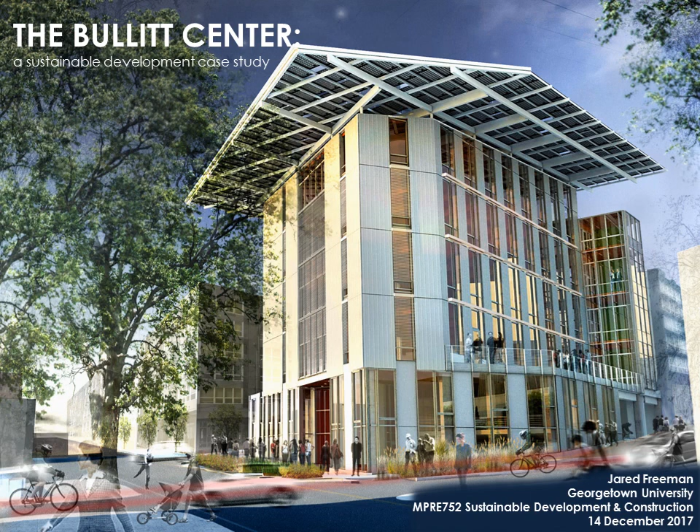Hello, class. The Bullitt Center, built in Seattle, Washington in 2013, is considered to be the most sustainable office building in the world. A project with such high performance level has never been done at this scale before. The Bullitt Center comes in at 52,000 square feet with a project cost of $32.5 million.

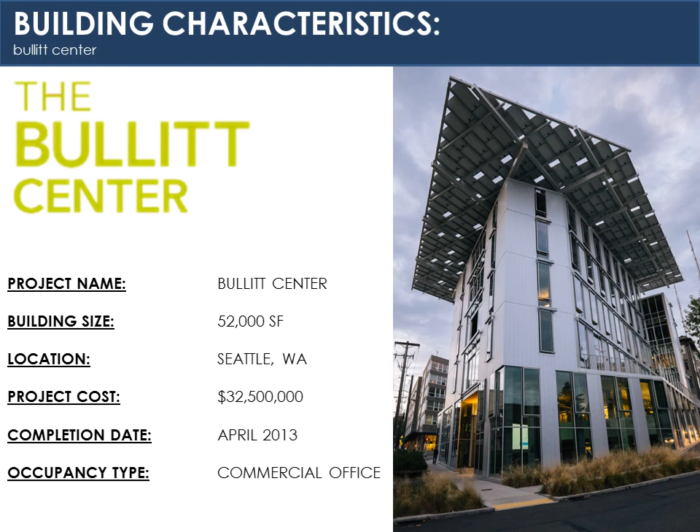The project team starts and ends with the owner and developer of the building. The Bullitt Foundation, a sustainably charged private foundation that founded Earth Day and promotes responsible human activities and green communities, is the sole owner of the property.

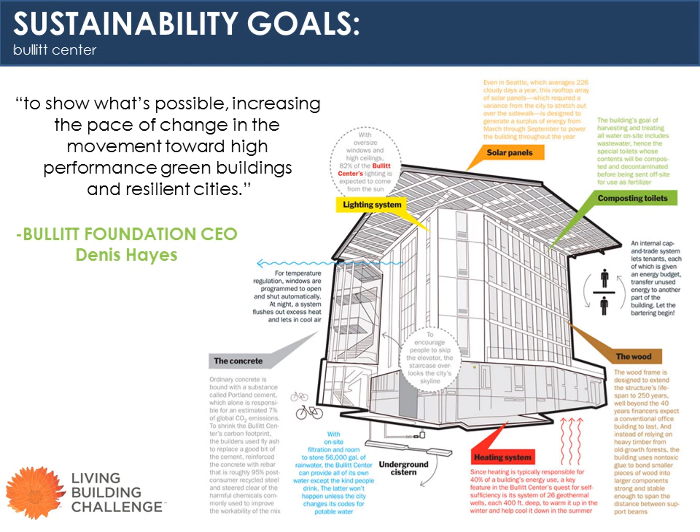The Bullitt Foundation had clear goals set for the development of the Bullitt Center. Denis Hayes, the foundation's CEO, understands the harsh effects buildings are having on our environment. As a result, his goal for the project was to show what's possible, increasing the pace of change in the movement towards high performance, green buildings, and resilient cities.

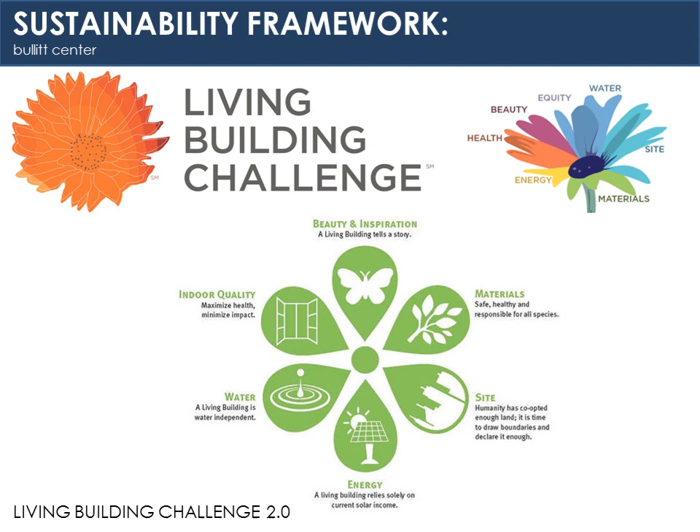The Living Building Challenge is the best framework for the Bullitt Center to meet the end goal. The program, made up of 7 petals, is considered to be the most intense green framework and the best for the environment. Much of the framework relies on self-produced and renewable resources in order to become more environmentally independent and self-sustaining. No project of this size had ever become Living Building certified.

With the team in place, the best approach to maximize expertise and efficiency was with an integrated design process. This consists of all parties being engaged in all aspects of the project as a complete team from beginning to end, allowing for every partner's point of view to be considered in an effort to come up with the best possible solution.

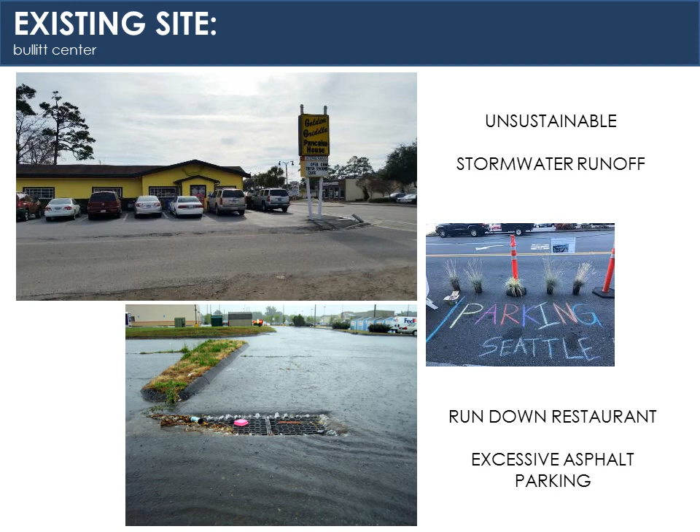Regarding the construction of the Bullitt Center, first and foremost, existing on-site was a single-story restaurant with a large asphalt parking lot. The site needed to be cleared in order to start the project. Once the site was cleared and the structure of the new building was being erected, it was important to the design team to minimize the embodied carbon used in harvesting and producing building materials.

To produce concrete, a lot of carbon and energy is expended. For this reason, the use of concrete was minimized to the foundation and first floor of the building for structural reasons. Heavy timbers from FSC certified forests made up the rest of the structure, which was much more environmentally friendly.

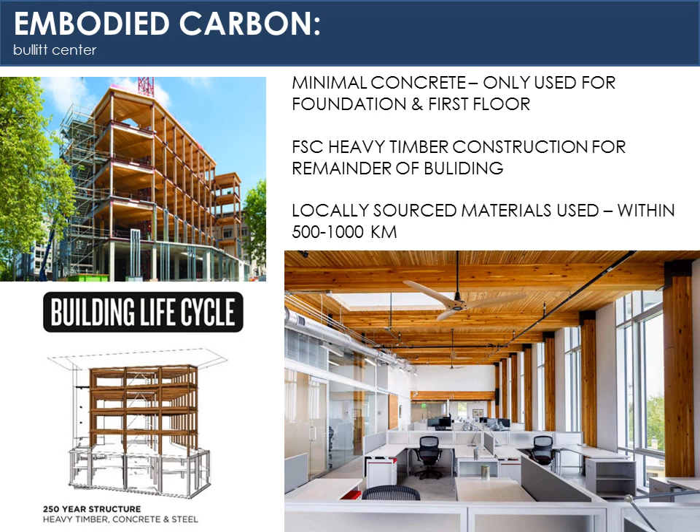Next, as a result of being able to build from a clean site, the building was oriented to maximize energy production. 575 total solar panels were designed and installed in an array above all neighboring roof lines. They have the capacity to generate an estimated 230,000 kilowatt hours per year, enough to power almost the entire building on its own.

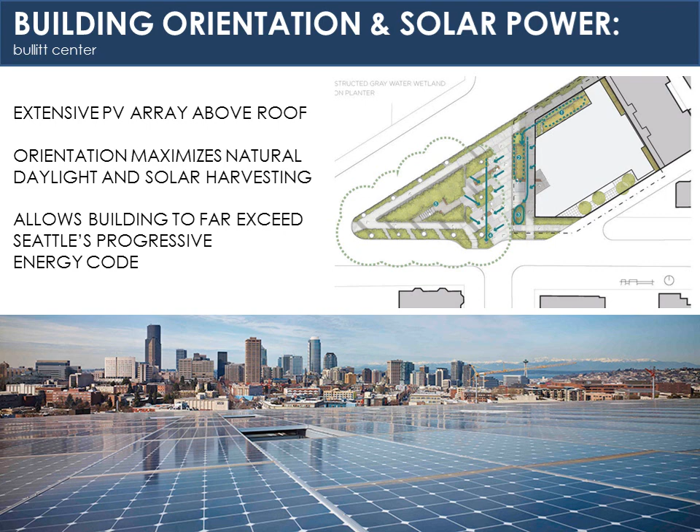Also, as a result of the building's orientation, natural daylighting is maximized, allowing for the reduction of artificial lighting. The Bullitt Center's design includes the use of a triple glazed curtain wall facade that allows a specific level of light into the building and also controls the heat transfer from inside to out.

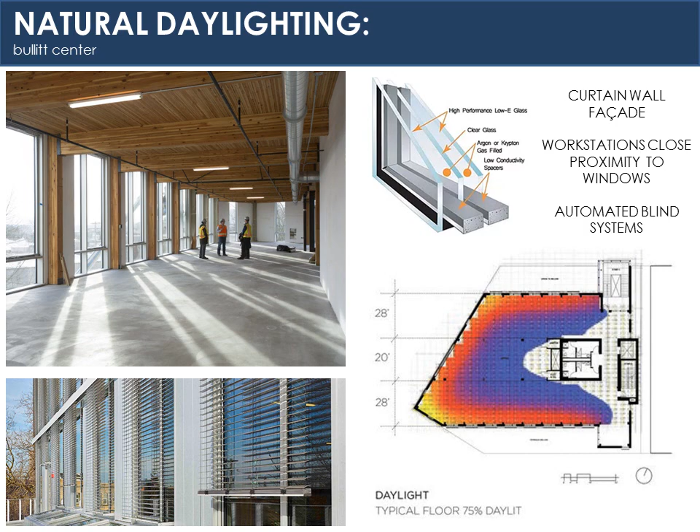All workstations are also within 28 feet of the exterior facade, ensuring that all building occupants will have access to daylight. Finally, an automated blind system is also part of the daylighting strategy. Blinds can reduce or increase glare and quality of light depending on the specific task at hand. In situations where artificial light is needed, LEDs are used.

In regards to optimizing air circulation and occupant comfort, the Bullitt Center's curtain wall facade also has operable windows allowing for air quality, building temperature, and comfort to be personalized per occupant. Being glazed on 3 of 4 sides enables air to circulate properly with taller floor-to-floor heights, allowing for heat to rise and exit the building.

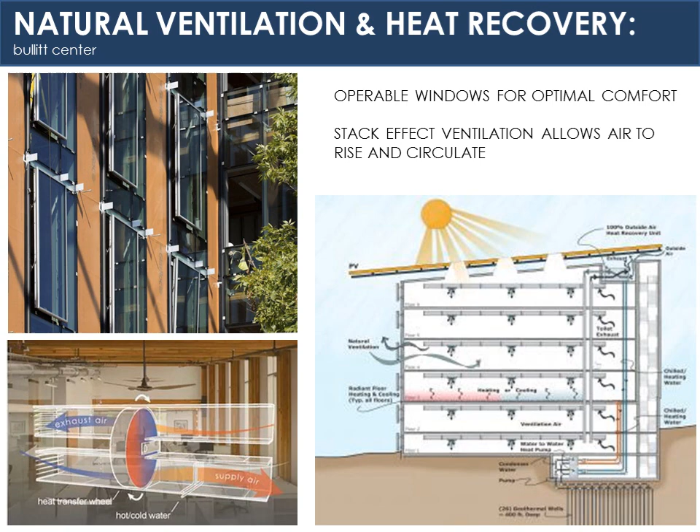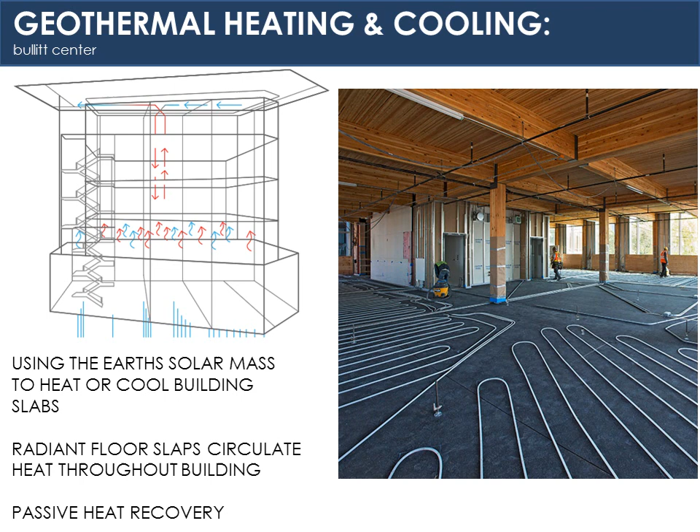Lastly, in terms of energy, a geothermal well and heat pump system was paired with a radiant slab system to provide heating and cooling to the building spaces. This system takes advantage of the heating and cooling properties of the Earth's surface to heat or cool water or glycol, which is then pumped throughout the Bullitt Center's floor slabs and released into the building. Heat is also recovered by taking advantage of hot exhaust air to preheat the incoming supply, reducing the energy needed to comfort the space.

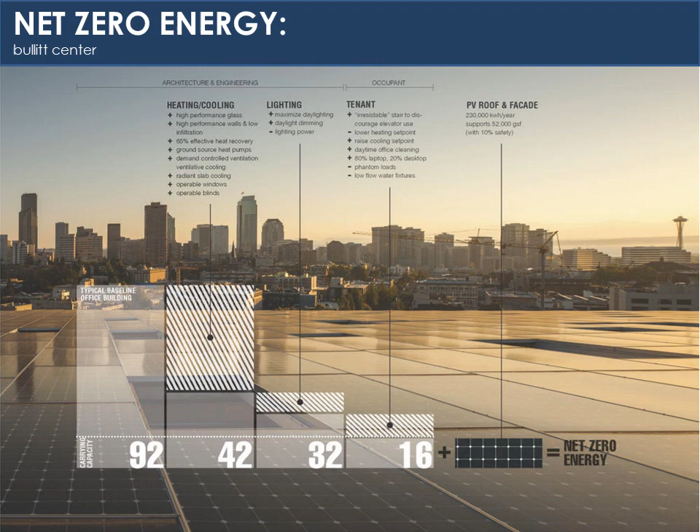As a result of these energy-saving, sustainable strategies, the Bullitt Center is a certified net zero energy building. In its first year in operation, the development actually produced energy in excess of what it used.

The first water-saving tactic is related to the solar array on the building's roof. Underneath the panels is a complex rainwater catchment and harvesting system. Rainwater is captured and piped down to the center's basement and put through various filters and an ultraviolet light treatment.

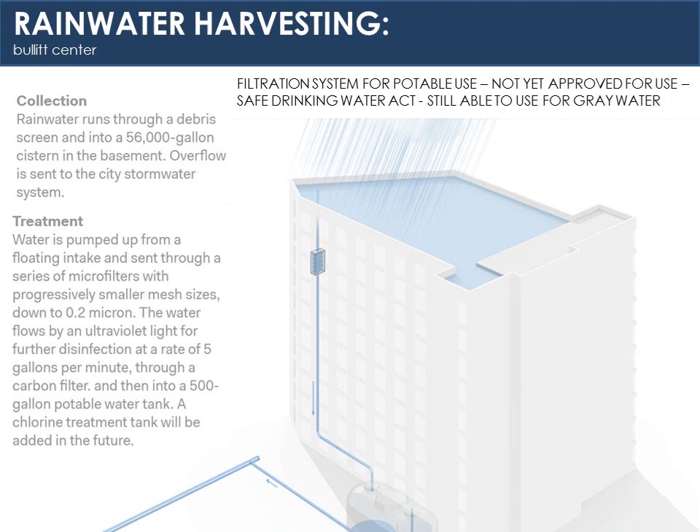At the time of the design, the system was meant to produce potable water for occupant use. Due to current regulations, however, this has not been allowed. As a result, the filtered water can still be used similarly as gray water. Gray water is filtered similarly, but instead of going through an ultraviolet light treatment, it is pumped back up to a green roof where the wetland treatment system treats the water.

Self-filtered gray water is used in multiple ways at the Bullitt Center. Not only is it used for non-potable use within the building, but also to provide irrigation to McGilvra Place Park, the first certified living park in Seattle, which is located directly adjacent to the Bullitt Center.

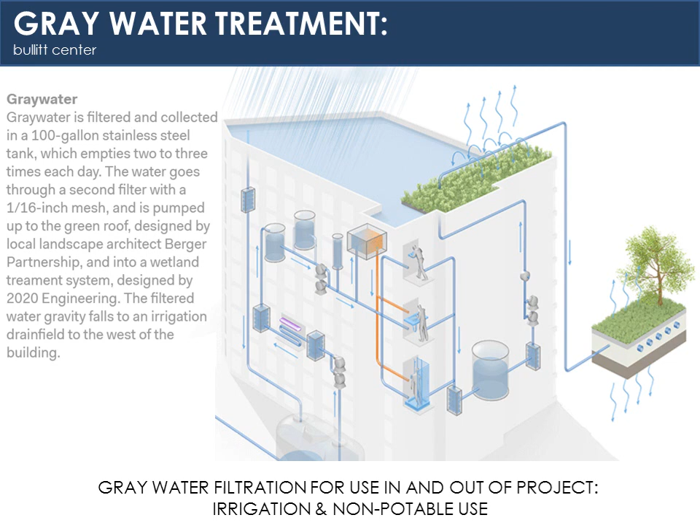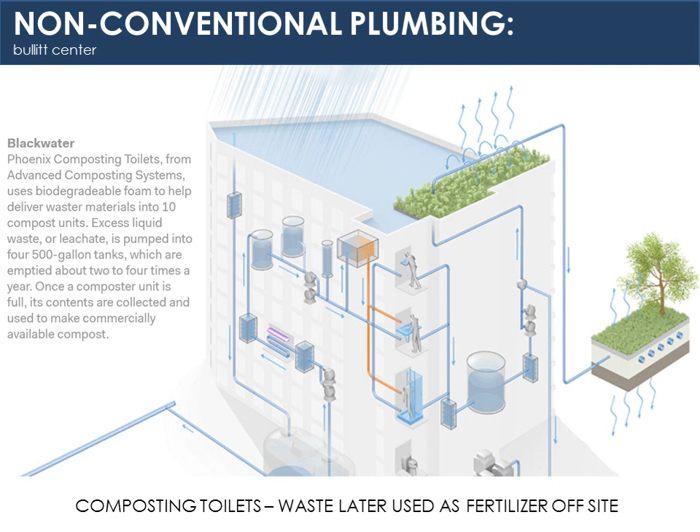Lastly, instead of using traditional plumbing and toilet fixtures, the Bullitt Center provides composting toilets for building occupants. The strategy saves the building much water. A typical standard toilet uses 1.6 gallons of water per flush, whereas composting toilets use nearly nothing. In a building that will have over 100 workers, the difference in water use is significant.

Black water and waste are emptied from the composters roughly 2 to 4 times per year. From there, before being released back into the environment, the black water is also filtered through a dense constructed wetland that will absorb all toxins before the waste is sent off and used as fertilizer off-site.

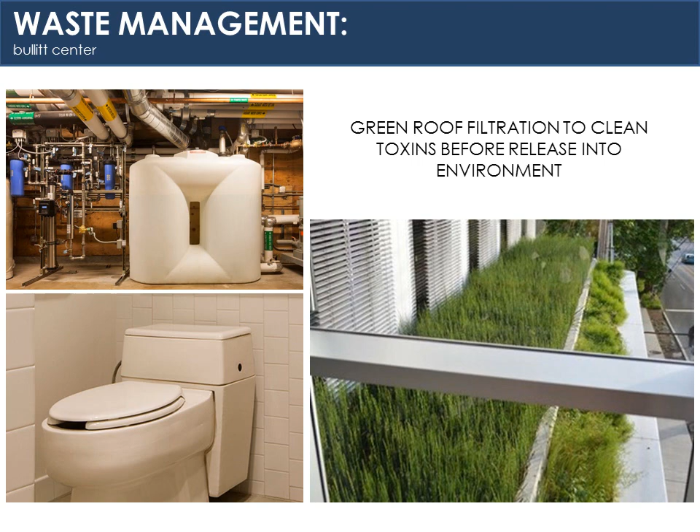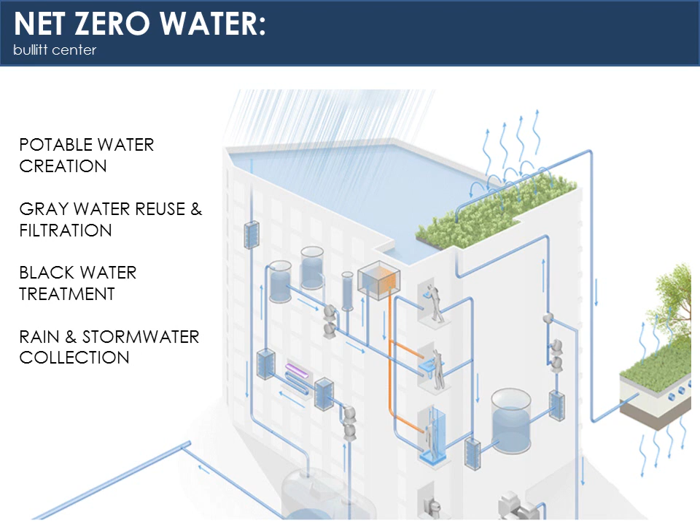After taking into account the water savings from these sustainable techniques, the building is also certified net zero water. The Bullitt Center is one of the only buildings in the world to be both net zero water and energy. Quite the significant accomplishment for a building this size.

Regarding the finishes used in this project, the designers were sure not to use any Red List or VOC-emitting products that have the potential to cause issues such as sick building syndrome. Studies have provided evidence that the fresher the building environment, the more productive tenants' employees will be.

With such high levels of technology also within the building, there is need for a system to help automate the various components. The building management system contains sensors that will control the blinds, mechanical and ventilation systems, among other things. By monitoring and optimizing when systems will need to be adapted, energy use is minimized.

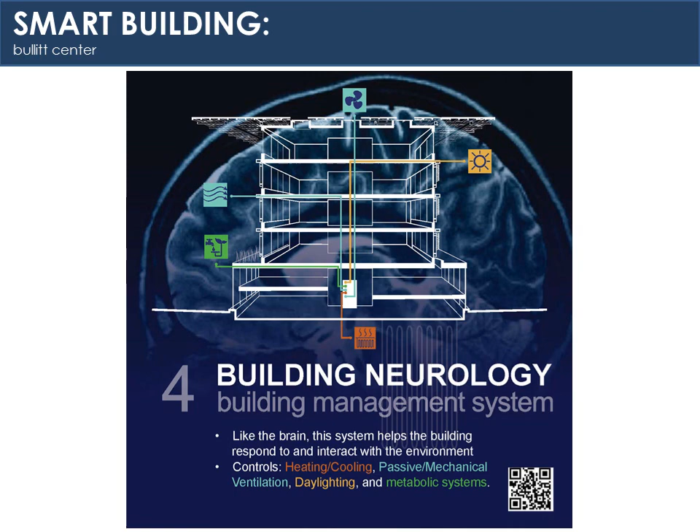Minimizing building energy, carbon, and water use is only half the battle. Changing the culture we are used to is important as well. Instead of providing a parking lot or garage on site, no vehicular parking is offered. A bicycle garage with locker rooms are a part of the building's program in an attempt to get building users to not drive to work and instead run or ride a bike or find a more sustainable form of transportation.

Tours are also given of the building to further educate the public on what can be done and what is being done to make our world a healthier place. Finally, the monumental stair that is so visible from the building's exterior entices people to travel between floors using this path and also provides incredible views of the city skyline.

From a contractor's point of view, certain measures needed to be taken into account, such as material recycling, material sourcing and use, future updates, and air quality. Schuchart, the general contractor, made sure all material waste was disposed of properly and recycled as necessary. The building's heavy timber structure was sourced from within 1,000 kilometers of the building's site, minimizing as much vehicular pollution as possible.

In addition to recycling construction waste, salvage materials were used as often as possible, especially within the tenant fit-out spaces. Indoor air quality was also sure to be monitored throughout the construction process to ensure the healthiest situation possible. Weekly meetings with all subcontractors and consultants took place to ensure all goals and requirements were followed. Finally, in order for future green upgrades to be made, construction needed to be easily disassembled so new products could be switched out, making the building even more green and adaptable.

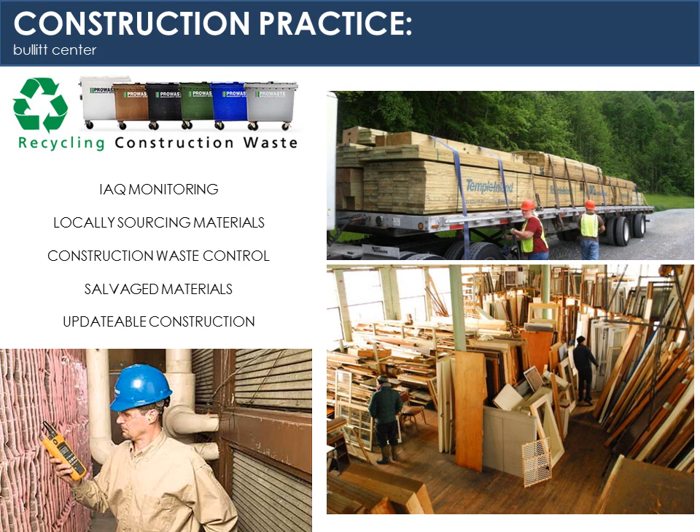Mandates and codes certainly needed to be followed throughout the process. The project manager needed to meet with the city to have the Seattle Land Use Plan amended to allow the project to exceed building height limitations. Seattle is also considered to have one of the more progressive energy codes in the United States. In addition to the energy code, according to State Code Revision 39.35D, all new construction also had to, at minimum, be certified LEED Silver.

Being living certified far exceeds these requirements and then some. Basic code requirements such as storm management regulations and drinking water regulations also had to be managed, but those were more common. Due to regulations, the Bullitt Center's potable water filtration system was not approved, even though it was installed during construction.

Due to the relative newness of sustainable construction, many risks were associated with the project. Compared to a conventional building, these systems were relatively untested. As mentioned, many hurdles had to be navigated and approvals had to be sought for the building to operate at full capability. Not all attempts were successful. Zoning was able to be amended, but potable water use was not.

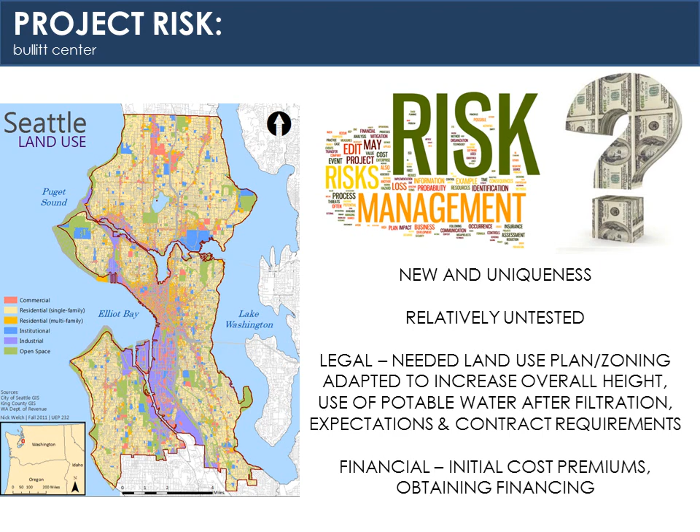Sustainable design also comes with significant cost premiums as well. As noted later in this presentation, the Bullitt Foundation had a hard time obtaining financing for this project. The Bullitt Center cost 23% more than a conventional building. CEO Denis Hayes from the Bullitt Foundation stated that this was the result of soft costs due to trying something new for the first time. It wasn't normal, there wasn't as much expertise.

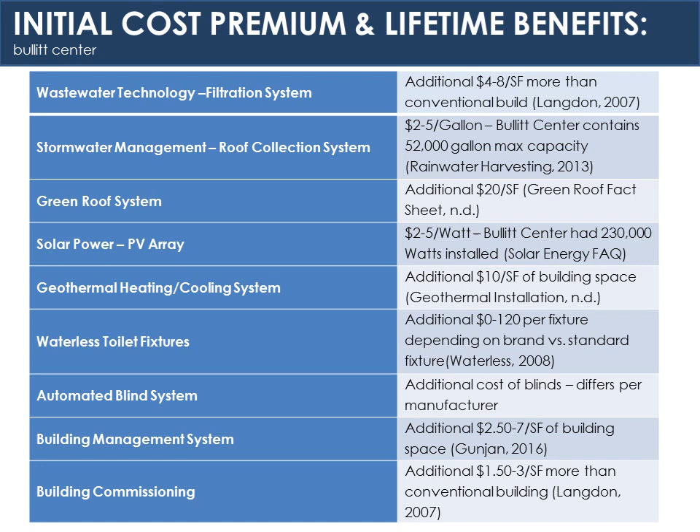Hidden inside the 23% premium, however, was an $18.5 million benefit in lifetime savings. The Bullitt Center was designed to last nearly 250 years, much longer than expected for a conventional building. All sustainable systems added first costs. The biggest culprit was the solar array, which alone added nearly $1 million to the final costs of the project. As noted, however, each system will save the Bullitt Foundation much more than initial premiums. As you can see, for example, the solar array will save the project 3 times more than it cost.

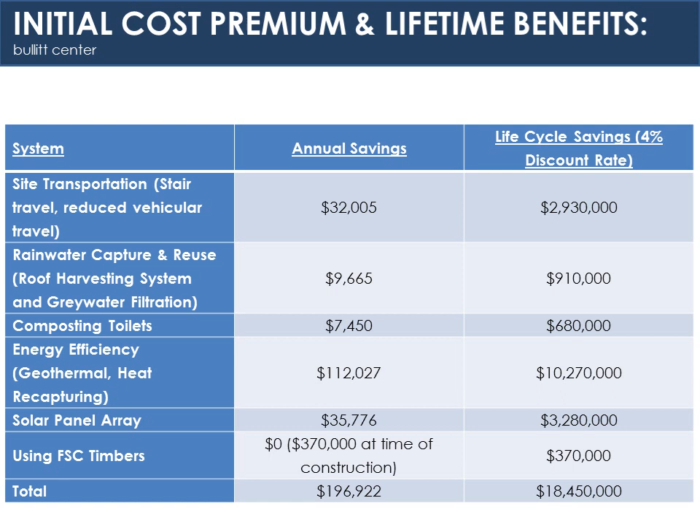Obtaining financing wasn't an easy task for the Bullitt Center. Hayes also stated that the foundation had to put much more equity in the project than they expected. The most generous of loan offers came from U.S. Bank, who would provide 50% of the construction value through the New Market Tax Credit and 3 community development entities, EcoTrust, MBS Urban Initiatives, and the Seattle Investment Fund.

With assets valued at nearly $100 million, this meant 16% of their portfolio's value had to be initially invested in the project. That's an unusually large amount because no loan agency knew how to accurately value the Bullitt Center due to its advanced sustainable technologies. In an attempt to mitigate the cost premiums and initial risk, the Bullitt Center was eligible for many tax credits and rebates. The New Market Tax Credit was awarded as a result of building in a targeted, potentially struggling neighborhood. The Bullitt Center is thought to bring life back to the area and bring new development as well.

Another credit was given for the use of renewable energy, specifically from the solar panels. Also from the panels was a rebate for all state sales tax. Last, the center took part in a benchmarking program called MEETS. MEETS measured building performance and rewarded high-performance projects with utility savings. As a certified living net zero water and energy project, MEETS suited the Bullitt Center well.

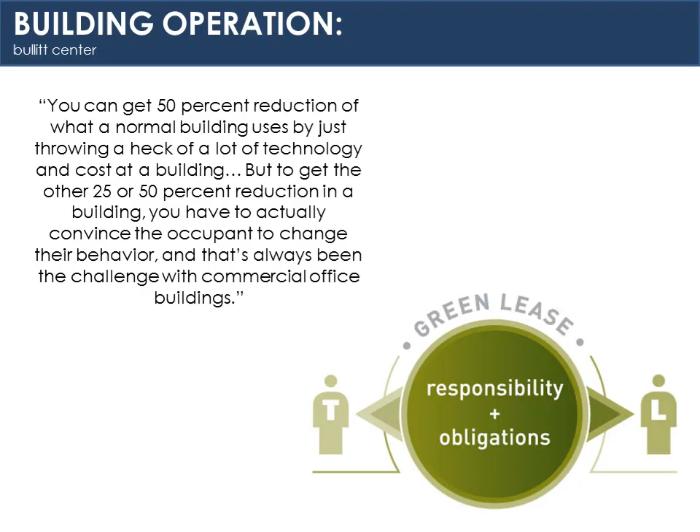Overall, the Bullitt Center development can be deemed a success. To end the presentation on one last quote, Denis Hayes said, "One building off by itself has zero impact on the world's climate, but a building that is influential and begins to change the way architects, engineers, contractors, developers, and financial institutions shape the built environment, that building was worth building."